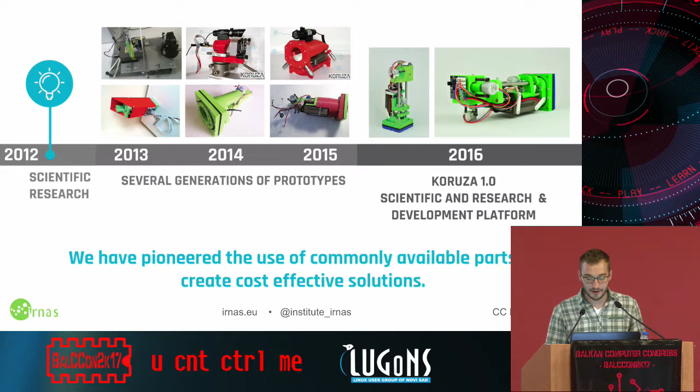As it says, we kind of pioneered the use of commonly available parts to create a low-cost, effective solution, and in a minute I will tell you about that. So here we are back at the first prototype, just tape, glue, and some spare parts.

This gray box which you see here is a media converter. You're probably familiar with it. Basically, you have power, you put an Ethernet cable in, and on the other side you get the SFP module connector, and the SFP module is a thing which converts electrical signals to optical signals. The thing we realized is, okay, let's try to use SFP modules without optical cable. Is it possible? So we put this together. This golden thing on the top is a green laser for pointing, and the black thing is just a lens for collimating the beam.

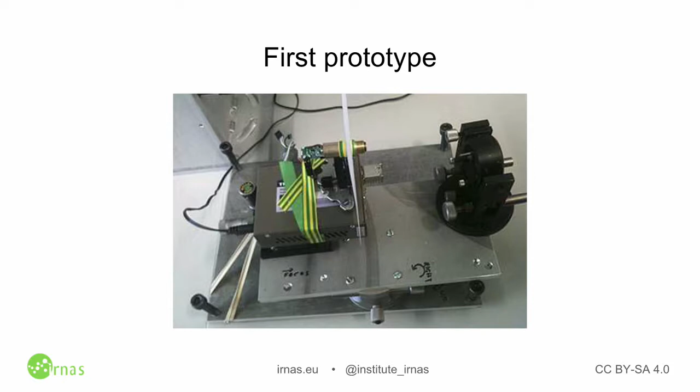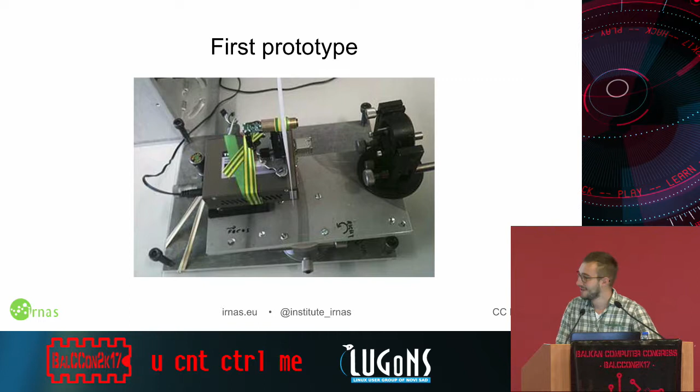This first prototype could do it for 1 second, at 1 gigabit per second, over 100 meters, and that was enough for us to continue. So basically, after putting it together, it all broke down because it was not usable. But then we realized, okay, it's a nice time — we have now 3D printers, nice little things.

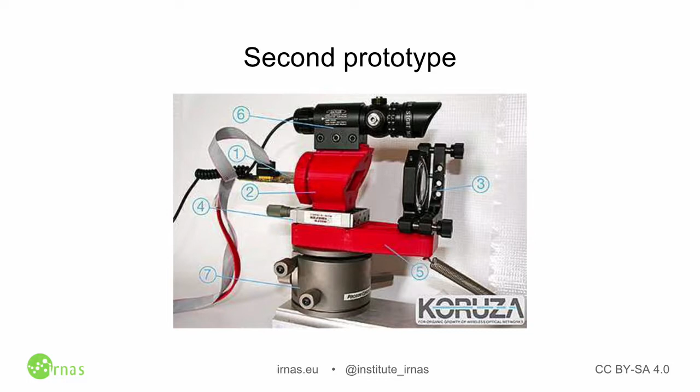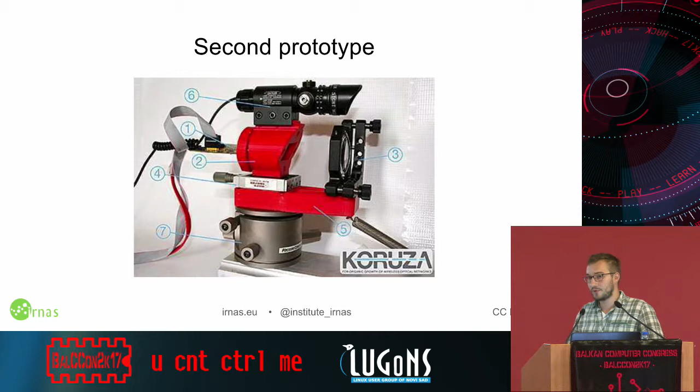So let's use that and like a glue for all those parts. As you can see here, just a few 3D printed parts, and now we have something that is working, but it's not something you can reuse actually, because it wasn't that stable, but it was good enough to prove that this device could work longer and more efficiently.

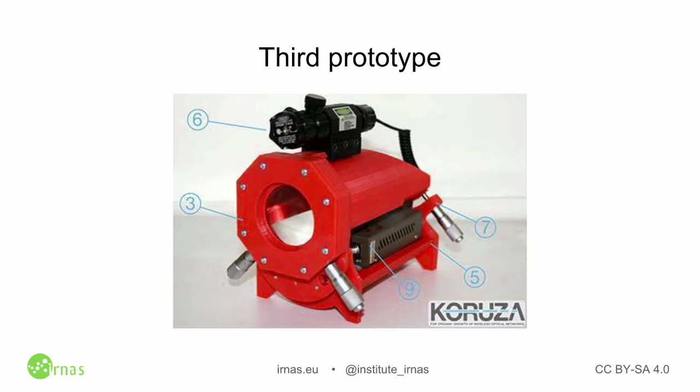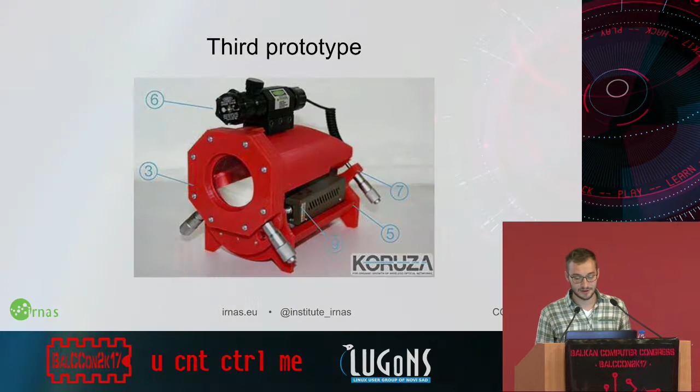We 3D printed some parts and thought, okay, this 3D printing is nice, so why don't we just 3D print this device? And we did that. And don't do that, that's the point. Because if you want to 3D print a big chunk of parts, it never ends up well. You spend too much time, and at the end you need to adjust them and put them together, fit them nicely, especially for precise products. And that's not good. So again, it was just an evolving phase.

We learned from it and moved on. This 3D printing technology was really interesting for us, so we said, okay, let's try to build our own 3D printer.

We liked all the 3D printers, but we didn't like that some of them had parts you can only buy from manufacturers. So if you want to build it, okay, you can buy everything on the internet, but still some dedicated parts you needed to buy from them. That was not okay for us, so we built a 3D printer that you can basically build anywhere because it used commonly available parts.

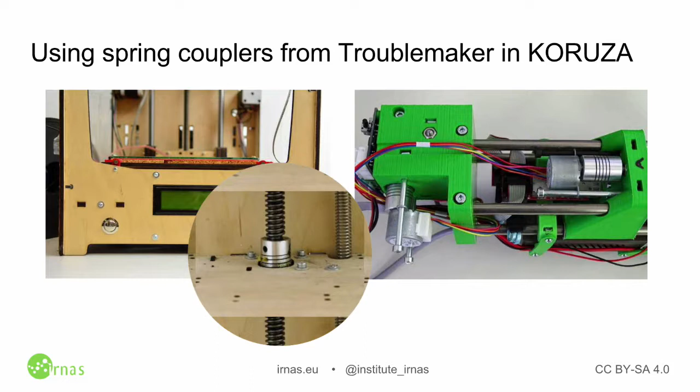Then we learned that we need to use as many commonly available parts as possible to get this product really cheap. So while we were designing and building this 3D printer, it was nice because we learned some things and saw some things we could use in our new prototypes of the KORUZA.

For example, these spring couplers were great. As you can see, they now connect the motors to shafts in our different product.

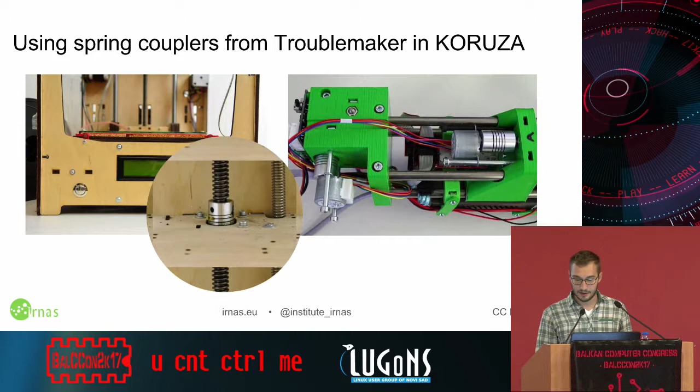Like that previous picture, sliding bushings from Troublemaker, our 3D printer, were also implemented into one of the prototypes of the KORUZA unit. And that's the thing, try to use some of your ideas from other products in the current product you're working on.

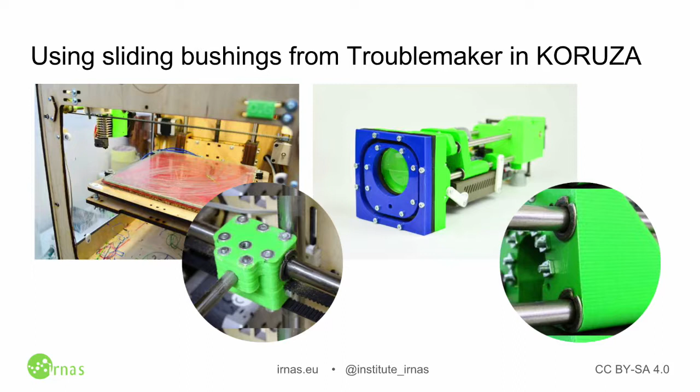So after some time, here is where we are. Now we have a prototype that is ready for testing, that is stable, that is working nicely, and we can configure it easily and change all the things that we see need to be changed.

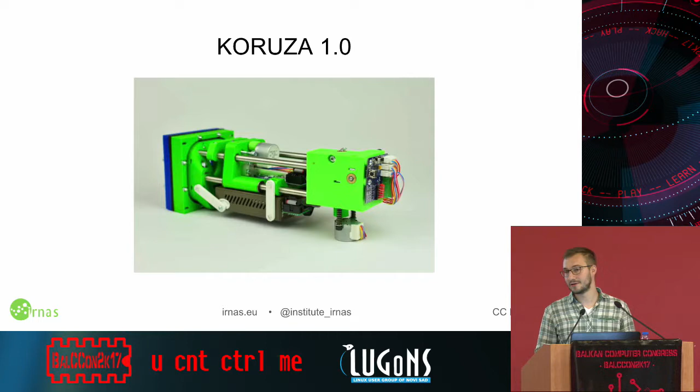So this here is the KORUZA 1.0. We had a fully modular mechanical design, enabling easy modification for a variety of use cases, improved stability, reliability, 3D printed part design in OpenSCAD environment. Not a good idea again, but you will see. Interconnections with stainless steel rods, as I said, automatic alignment and tracking, and available as a do-it-yourself kit.

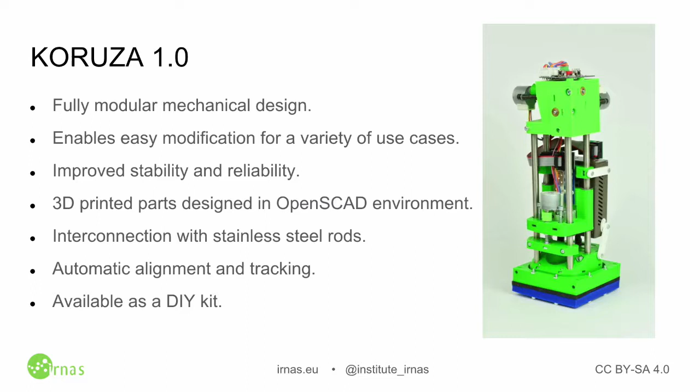Because we were doing this as an open source project, we had this interesting connection with many universities that did FSO systems. We really learned from them because they saw what we do, they could see the design and everything we did, and they had really nice suggestions for what we could improve. So this is one of the aspects of open source that is really good, you can talk about your idea.

So now we have this stable version. We want to test it. We need to prove to people that this works as it should, so you need to write some research papers. First, we needed to see that this beam is reliable, and so we built the beam scanner.

Basically some electronics, and again, we're back to the 3D printer. Why don't we use the 3D printer for this nice movement to measure the beam strength? You can see on this picture how we did it.

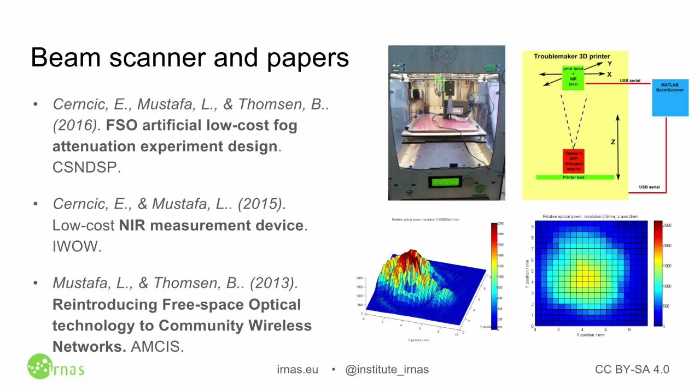Also, here you can see some of the papers we did over the years trying to prove this technology is really efficient and works. At the end, we did it with the papers, but what about the practice?

Build the test network. So we built a test network in Maribor with, I think, 10 links working between each other, creating a network, and people had internet over these units.

One thing we noticed, you basically need to have optical visibility to have signal, and that's okay because between buildings you probably won't have something stopping you from that except some birds, but that packet loss you have in your Wi-Fi too. Some problems could occur with snow, fog, and rain.

After a while, we saw that snow and rain are not that problematic, because even in dense snow and rain you can still see basically at 100 meters. And because the particles are really big, it's not a problem for the signal to go through with full strength. But fog could be a problem, because in fog, after a few meters you don't see anything, and there are a lot of small particles.

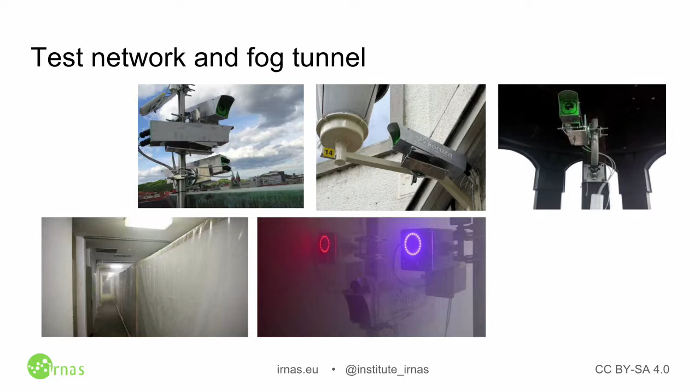So how do you test fog? Again, do it yourself, build a fog tunnel. We found a factory, a 50 meter long tunnel in an old factory where FAP was made. So basically we built the tunnel, you can see it here, with a plastic cover, and had some fog machines to produce fog and test it.

We wrote a research paper, and saw some rule of thumb: if you can see that other spot or unit you're looking for, then you can basically shoot at twice that distance. So this was good enough for us to say that for this particular distance, up to 140 meters, this will work in any case.

Okay, this was finished. So let's sell this. Does anyone want to buy this? This is, let's say, a professional product, because somebody who wants to buy this is probably some operator or internet provider or something like that.

But when you come and say, okay, we have a really cool open source project, they say, oh, open source, okay. Then you say, oh, you see all the design files, it's 3D printed, really cool. Oh yeah, 3D printed, nice. And they don't call you back.

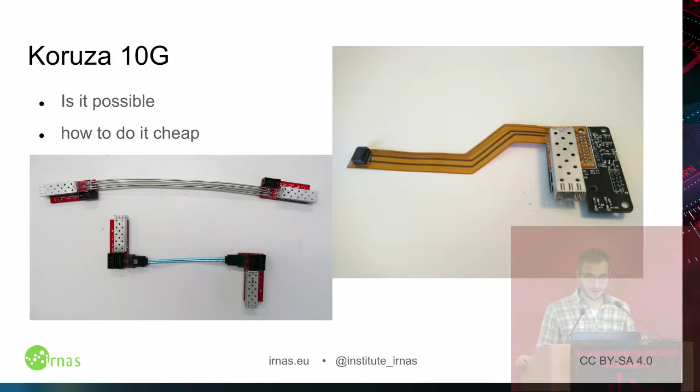Okay, just modify a bit what you have. Again, buy some coaxial cables, solder them, and try it. And it's working, great, now we can proceed. Don't do experiments trying something impossible — first try it with what you have.

And these coaxial cables were nice, but they were a bit expensive and a bit rough, couldn't bend them as we needed. So how do we do that cheaply again? Flexible cables — nice thing, we can move them as we want, and we can put differential pairs with the special impedance as we want. But how do we connect that to our board? That was a big problem.

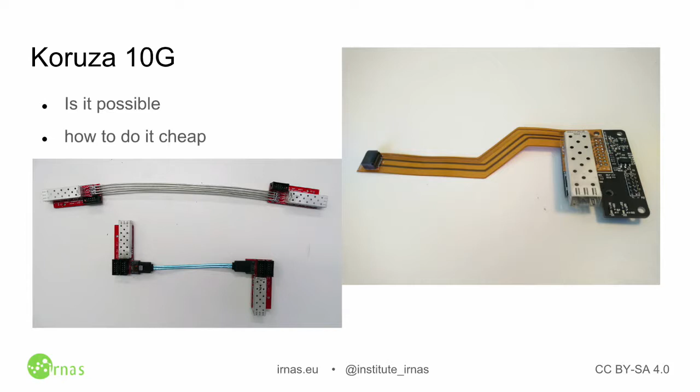You will see this here, I have some prototypes at the end. It was a few months of work trying to get this working, because you can have rigid to flex PCBs, but they are expensive. And at the end, we figured it out.

So we basically made a sandwich: you have a rigid PCB, on it you have a flex PCB, and the SMD connector is soldered onto that flex PCB. And over that comes the cage, which holds everything together. Now we have our own, let's say, rigid to flex PCB, which is working great.

So what do you do? You move to something you're really familiar with. The most familiar platform at that moment for us was the Raspberry Pi. But the Raspberry Pi is how it is, you can't modify it really. You can put a hat on it, but then it's getting bigger, and we couldn't fit it inside. It didn't have everything we wanted, and that was the problem.

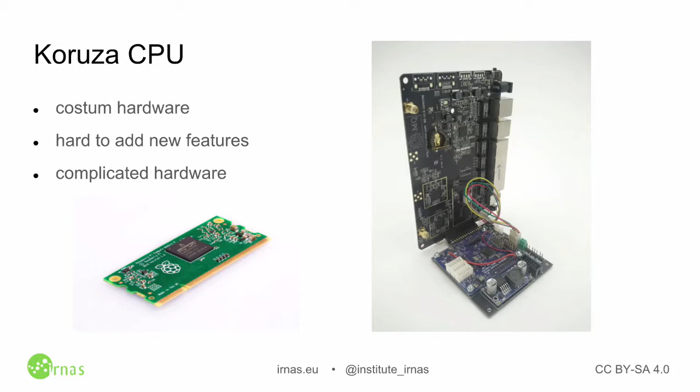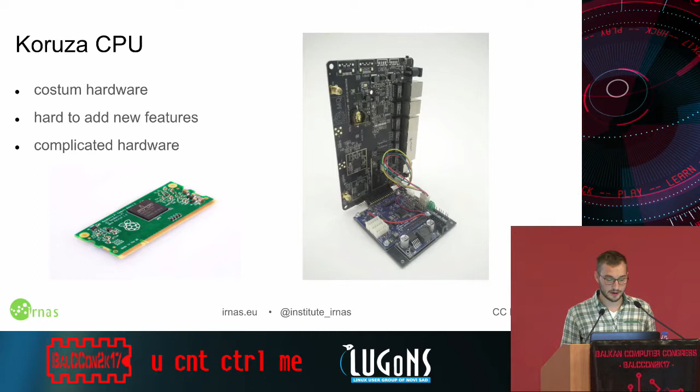So the Raspberry Pi Foundation has a really nice and neat thing called the Raspberry Pi Compute Module. Now you have three versions of it. Basically it's a SODIMM 200-pin module, just like DDR2 memory, and you have all the GPIOs from this Broadcom chip put out on this header. So now we have custom hardware working with something we know that's well supported, and now development is going much faster.

So there were a lot of these kinds of hacks in our product. Again, I'll mention this open source perspective, because we can freely talk to people and tell them what we do. That was really a big benefit for us, because they always had great ideas and suggestions on how we could improve it, and if they use it, what ports or interfaces they should have.

So this is why we actually had a camera inside, so you can log into the unit and see the other unit on the other side, and react quickly if there's a problem.

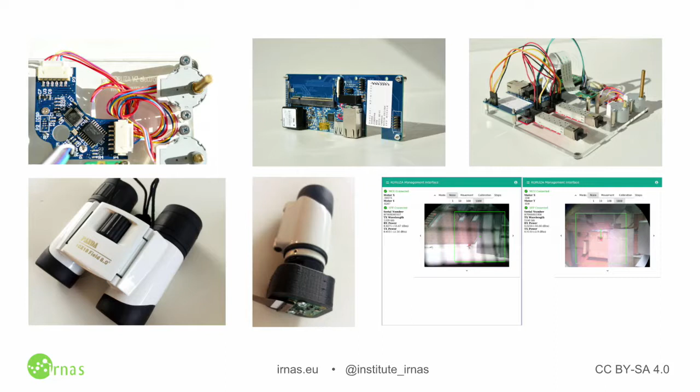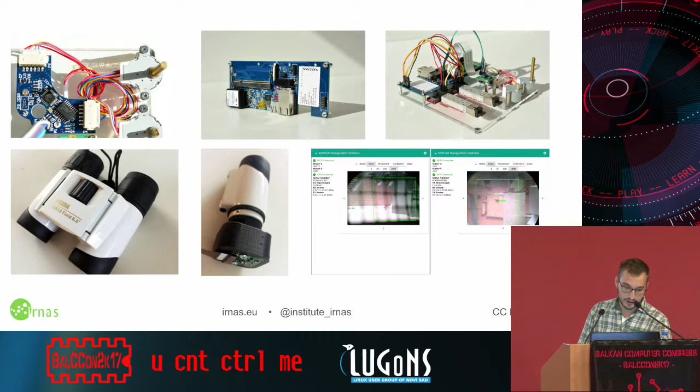So when we started to build this camera interface, we needed zooming — the unit is far away, how do we do it? Okay, go to the Chinese store next door and buy the first lenses you find. We did that, put it together, it's working. And now, in the latest device, we found those Chinese manufacturers, contacted them, and now they're making custom stuff for us. You can also see here the interfaces for the units, some testing bed, also some version of our custom electronics, and the custom electronics for our motor driver.

So through all this process, we encouraged open source, and it was really a nice thing. But at the end, like I said, when you come to big companies, they say, okay, it's really nice, but thank you, not interested. Then we really thought about it and talked to some smart people and realized we need to take a different approach.

So when we come to our partners, to our collaborators, the first thing we try to say to them is what benefits they have while using this open source technology. So we came up with three main benefits: total ownership, future-proof, and collaborative design.

Basically this is a copy slide from one of our blog posts when we realized that, and it's really well documented, so I wanted to read it to you. So openness comes together with total ownership, allowing full use and repair of existing products as complete design information is available. So basically, if the company goes broke and doesn't exist anymore, they can still use this equipment and they don't throw it away.

It ensures the devices are future-proof since they are designed and documented such that users are empowered to innovate, explore, and upgrade them outside the original specification. The lifespan of the device is expanded, their reuse encouraged, and their open hardware documentation enables communication between all parties involved. It also simplifies collaborative design, bridging the gap between development, manufacturing, and use of the devices, enabling evolution of the product to be optimal for everyone involved.

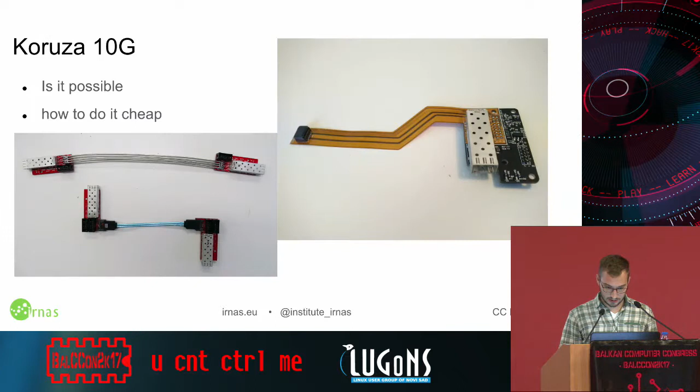Then these units, I'll show you just a sec. So you see also one big lens, this is for transmitting and receiving data. The one smaller lens underneath it is for the camera. And the two lenses are slow baud rate links, so the units can talk to each other. So if the units don't talk to each other, they know something is wrong, so they will send a notification: okay, there's a problem, somebody is jamming you or something is happening.

So it is pretty safe. If it's happening, you will know it right away, and surely that person cannot receive that signal because it's too small.

Okay, first of all, thanks for the presentation. Thank you. And the question I have is about this production unit, because you said that during development you had the unit which had a modular design, made for customization, adaptation, modification, for development. Does the same principle still hold for the production unit? Because usually in production you optimize the design.

So yeah, make it exactly smaller? It does not, it does not. Because this unit, it's again open source, and you can modify it still, and we left some ports and stuff so you can really modify it. But it's not meant for that, it's meant for use.